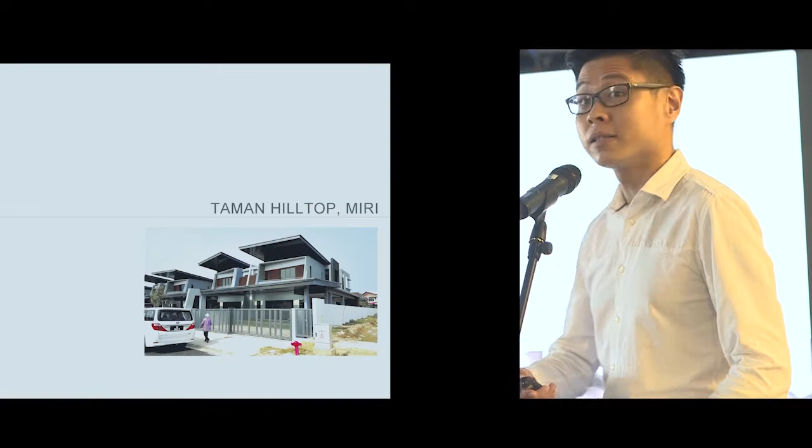So my first project is a small project in Miri. It's a semi-D project whereby the site is actually on the high ground nearby the airport.

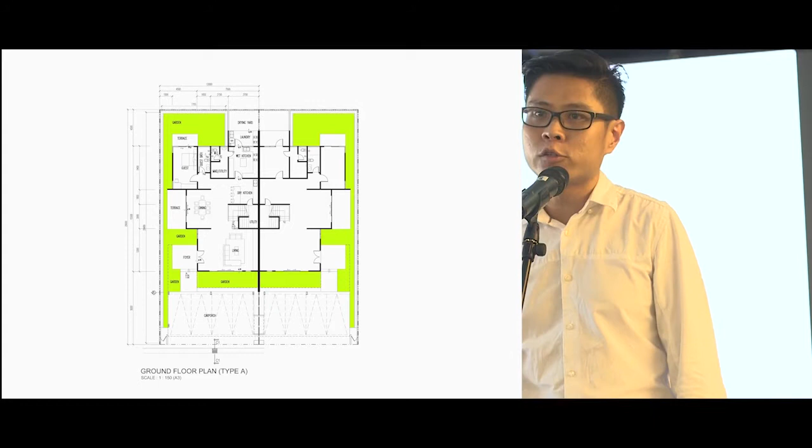So the client's requirement is simple: practical, market-friendly, do not break the bank.

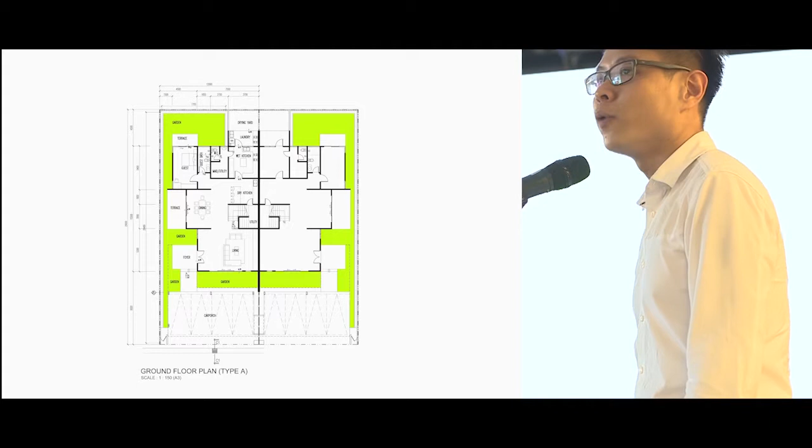So this is a floor plan that we came up with, something that's quite efficient and well accepted by the general market. So we were thinking, what can we do to insert some uniqueness into the project?

So we started with playing some Lego. That's my childhood pastime hobby. Now I'm doing it in SketchUp.

We did some form-giving exercise, adding up the roof. There are many versions that we did, so this is only one of them.

I thought the site is sitting right on top of the hill and you can actually see landings, the plane landing and all that. So maybe we could relate something to that.

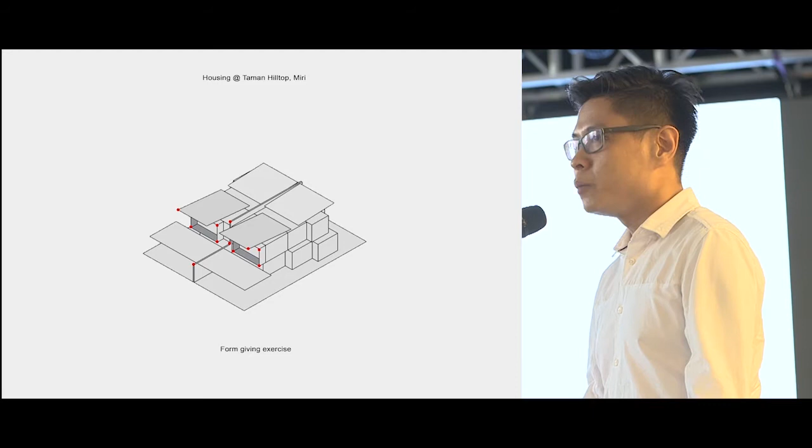Aerodynamism, adding some elements of high tech into it, and making it look a little bit like maybe a spaceship. So we start thinking of pulling in some points and trying to transform the shape into something less familiar.

It's an approach that I call the defamiliarization of standard form.

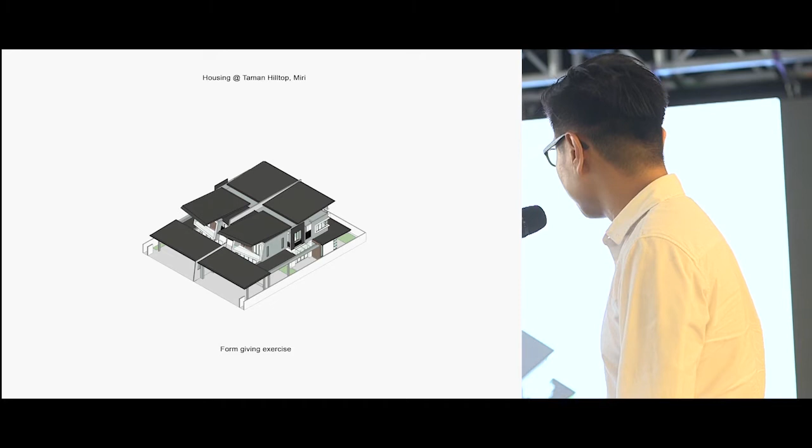The elements of a little bit of slanting lines are there. Most importantly, the client accepted it because it does not break the bank, and this is the final outcome. I'm reasonably happy with the result.

The second project I'm sharing will be Windsor Estate. For those who are in Kuching, you will be quite familiar with this project, where every time you drive from Boulevard to the airport, you will see this group of detached houses towards the end of the junction.

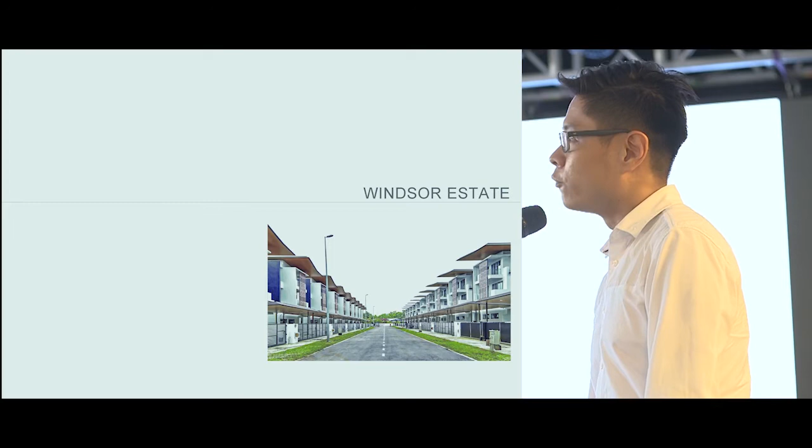So this is the location of the site, and there are about 51 units of them, all identical detached houses.

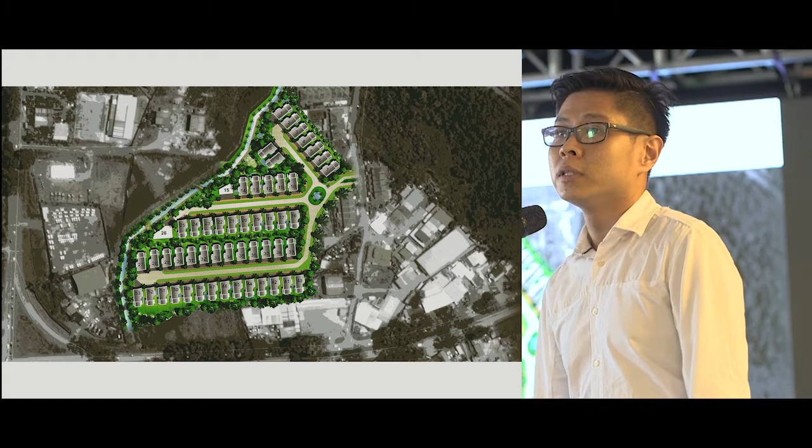In this project, we actually challenged the conventions or standard practice of housing typology. So it is a modification from semi-detached house typology.

This is actually a brainchild of my director, Dr. Sri John Lau. So I'm here just to convey how we developed the idea from a semi-D into a zero-boundary detached house.

But the underlying problem of this is when you need to paint your own house, you need to get consent from your neighbor. So we set back a little bit, 1 meter from the boundary.

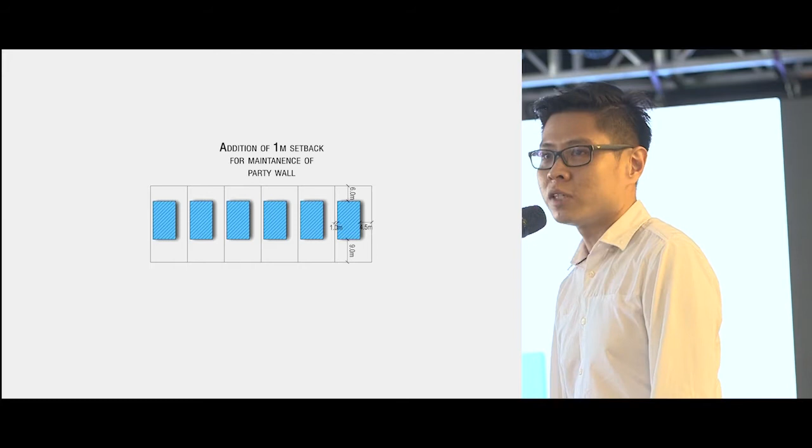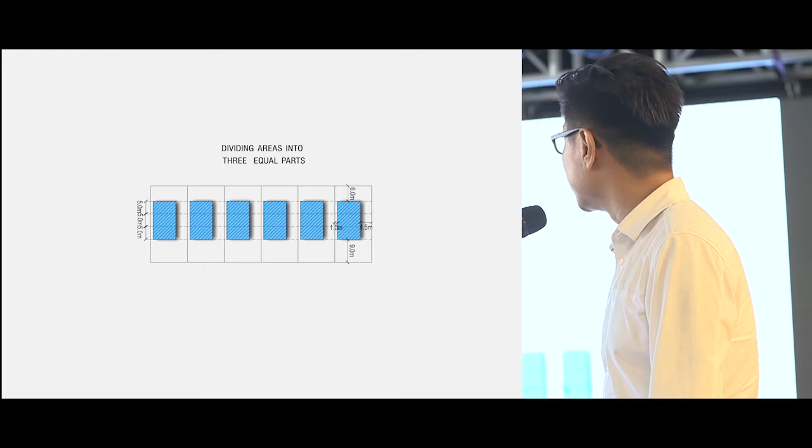So we tried another way. We divided the area into 3 equal parts, whereby we sacrifice a little bit of footprint and shift it, so it becomes like a zigzag kind of shape.

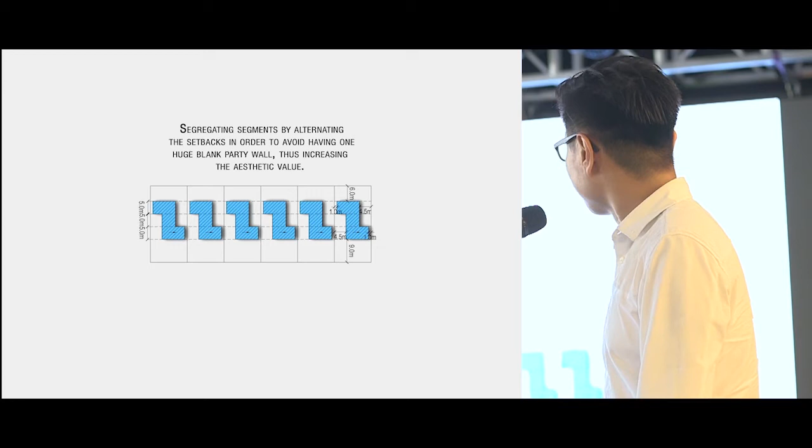This is a section over the house. We can see clearly that the split levels actually minimize the corridor space, and at the same time it also gives a much higher living room, much higher headroom for living room. We can achieve up to 4 meters at ceiling.

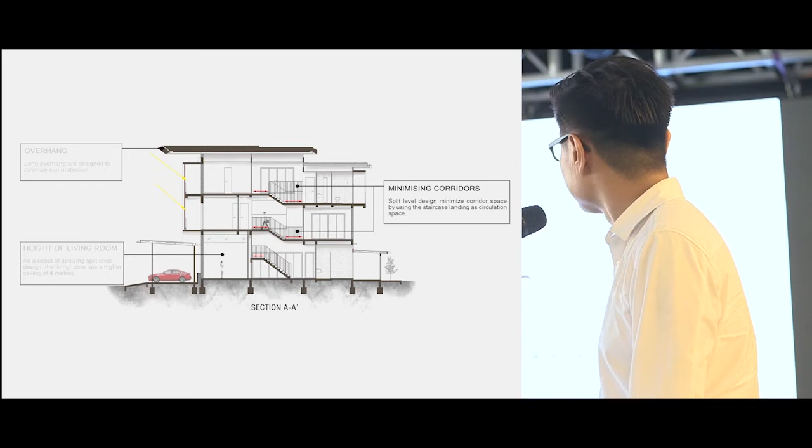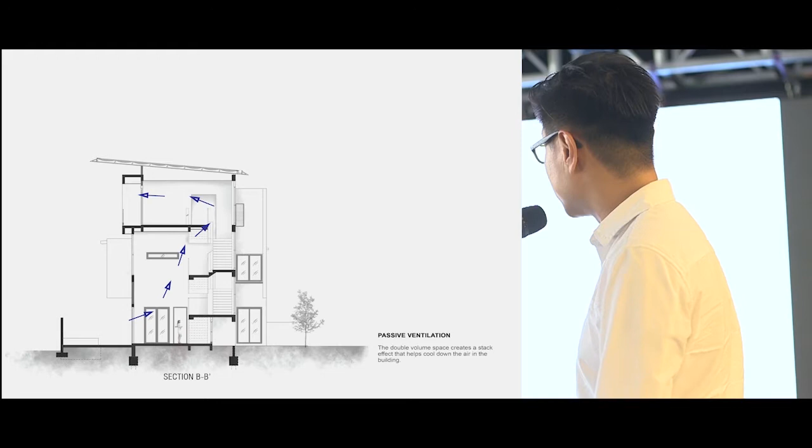Minimizing corridors again, and in the section through the central part of the house, we have a double volume dining room. Right next to it is a staircase, which acts as an air well. Hot air can come in from the sliding doors at the dining area and go up and exit through the family room up there, through the staircase as an air well.

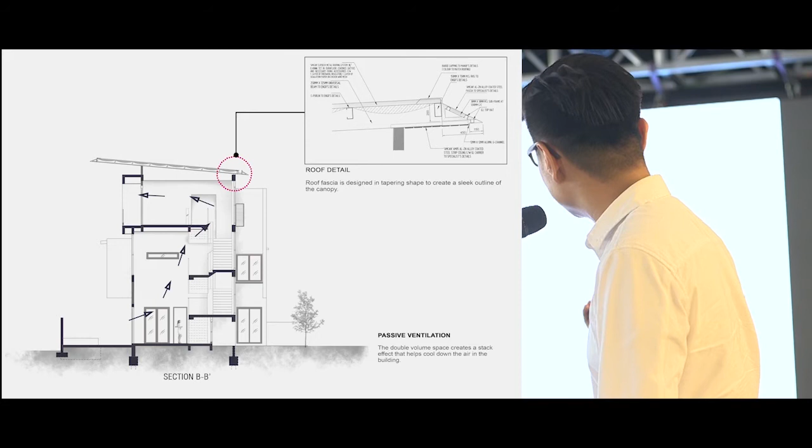Some details that we introduce are the sharp details, the fascia details, in order to make the roof look a little bit more sleek from the elevation. So this is the house.

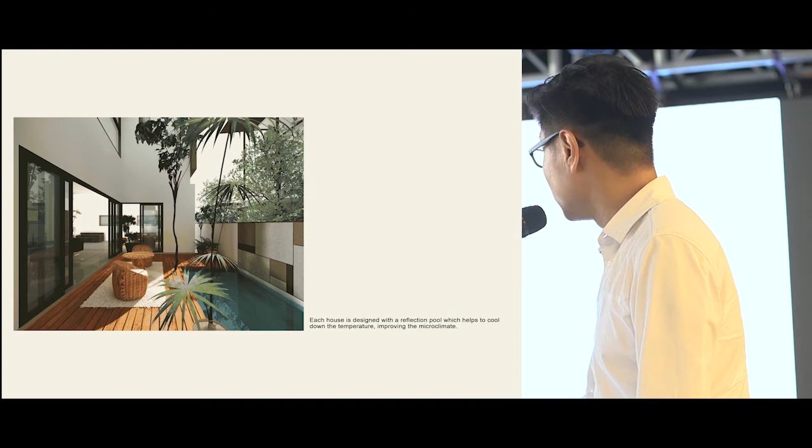So every house is equipped with a reflective pond, which can act as a cooling agent to the house. So this is a living room with high ceiling, and this double volume dining room.

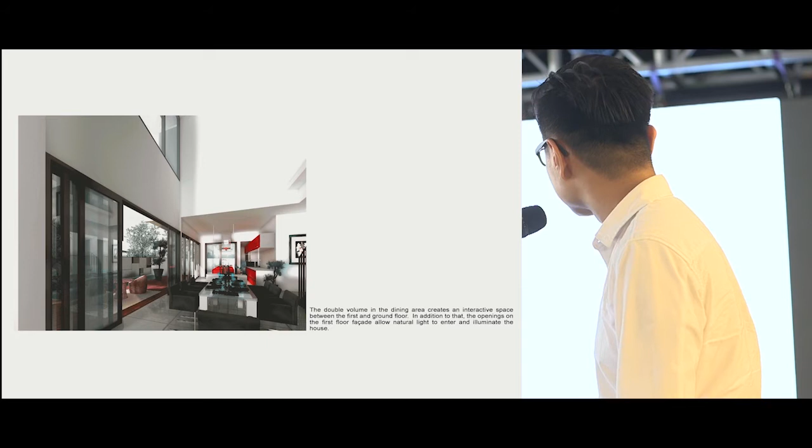So this was the rendering that we did for the marketing brochure. And I'm quite glad that it turned out the same, so we did not lie in our brochure.

So these are some other views.

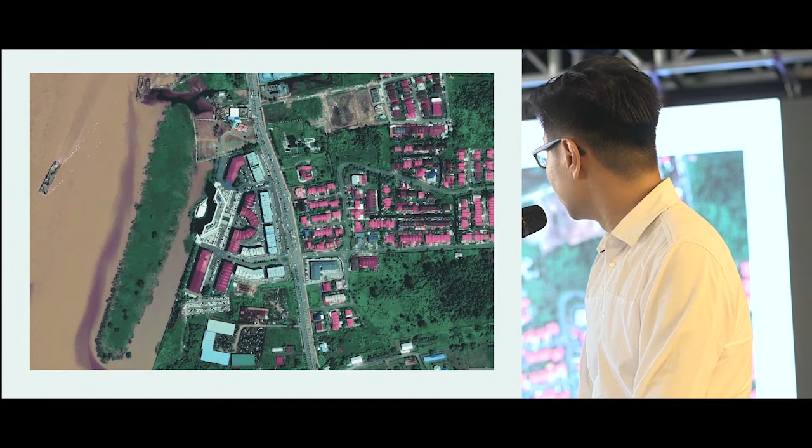So the next project I'm sharing is the first major project that I've handled as a project architect back in 2011. When I came into this project, it was already designed by a colleague. The site is next to Rajang River.

And this is the overall plan. This was the original design when I took over the project, designed by a former colleague. The concept is having a soaring, spreading wings on the top.

So the roof, what do you call that, the roof actually looks a bit like a soaring wing. And the archway in between actually signifies a gateway to Sibu. Also, as a corporate image for Rimbunan Hijau, which is a highly successful corporation originated from Sibu.

So this is a refinement that I did. I have a habit of doing models exactly as per tender drawings, so this was done exactly as per tender drawings. But towards the later stage of the project, the client decided to take out all the fins. It's a bit of a pity, but it's probably inevitable due to cost saving. So this was the final design of it.

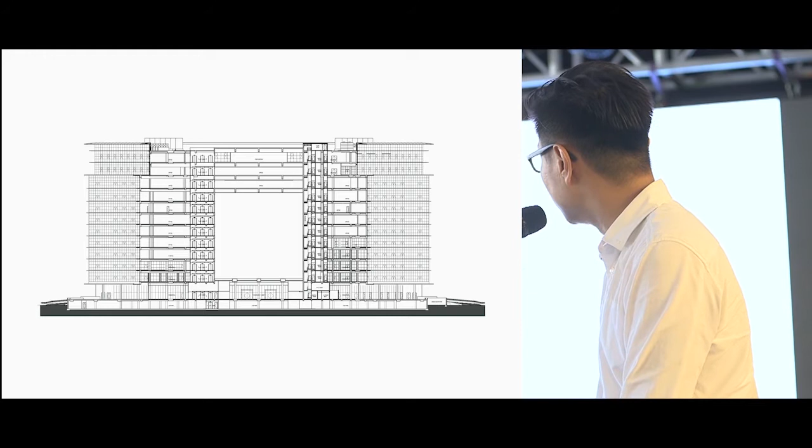So we have quite a long span in the middle, a 30-meter long span, and the engineers actually designed a series of box beams to support the bridge and form the gateway.

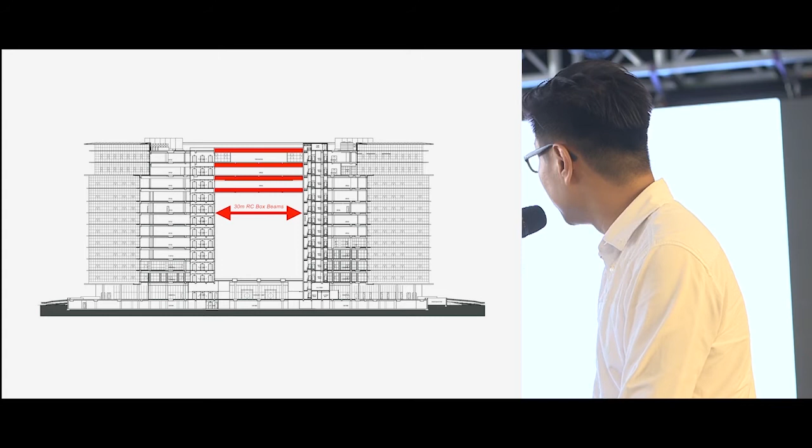In terms of the facade design, this was the working drawing that was handed over to me. So I thought, now that we can't do the fin, what can we do? One thing that we inserted into the facade is we vary the shades of the facade, whereby we introduce two shades of tint.

Another view from as you approach the building. This is the entrance view towards the archway, and another view from the other side.

There are some sharp corners that I thought were quite nice, but apparently some people do not like it because it's a bit too sharp and not good as feng shui, according to some.

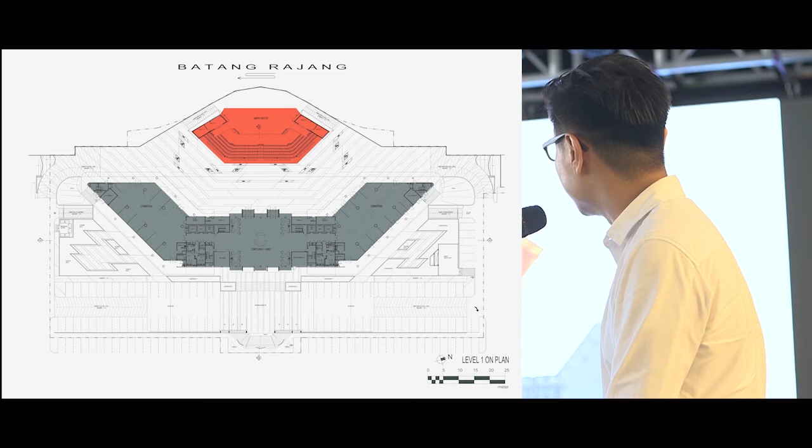We did some form study over the shaded area. So this is the study. We segmented them into a series of lines, and then we pulled up the lines to see what shapes we got.

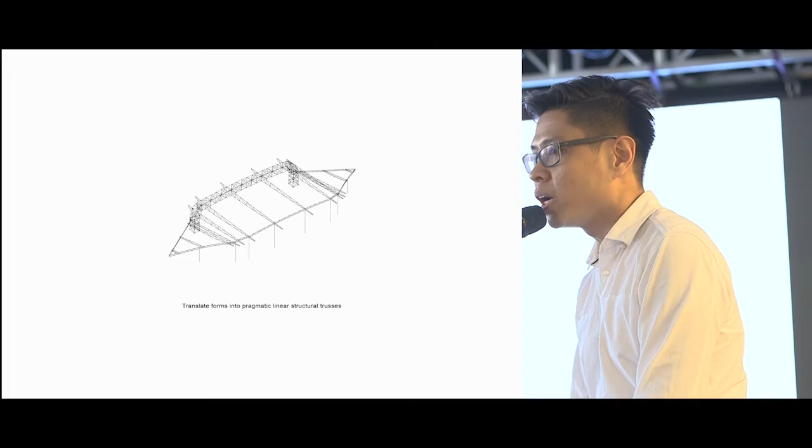This is the final shape that we've chosen. There are many shapes we've thrown away. We worked with the engineers to get a pragmatic, buildable structure using steel trusses, covered with standing seam roofing, to achieve the aerodynamic kind of shapes.

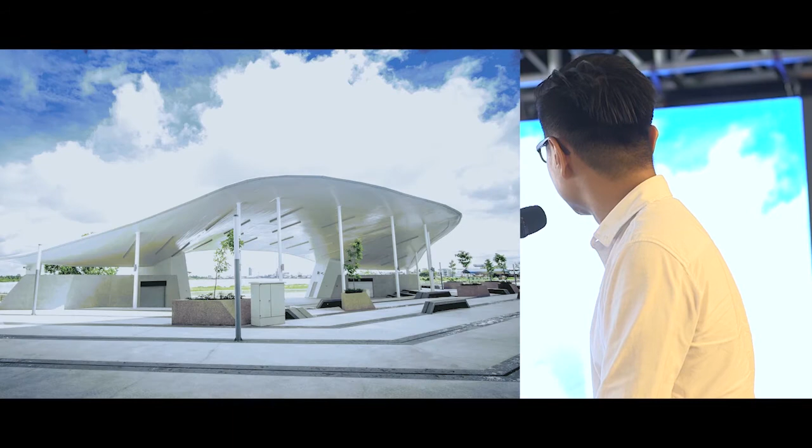This is the final result. This is a view from the low level, and another view. Unfortunately the workmanship is a little bit below my expectation, but the overall form is still there.

The next project I'm sharing is the New Sarawak Museum. Some of you may wonder how come the perspective looks different here. This is actually our winning competition scheme that landed us the job.

But it wasn't as what we have now. This is the competition scheme. It started with a tremendous study on the site.

This was the original Dewan Tun Abdul Razak, if some of you are familiar with it. It's an old building, so the site actually had an unfriendly access.

You need to enter from Jalan P. Ramlee, which is perceived as the back door or the back side of the street.

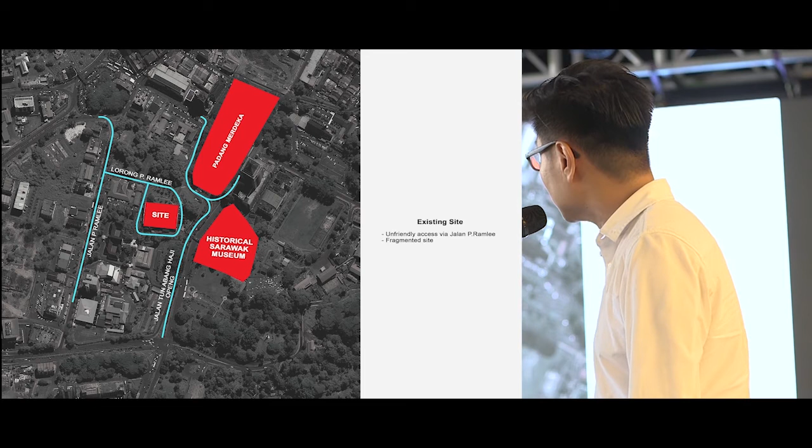Another issue we saw is that the site is very beautiful with greens, a bit of a hilly kind of space, but then they are all fragmented in a way. The Padang, the Historical Sarawak Museum, and the new museum site are all fragmented into three very strong, solid, independent blocks.

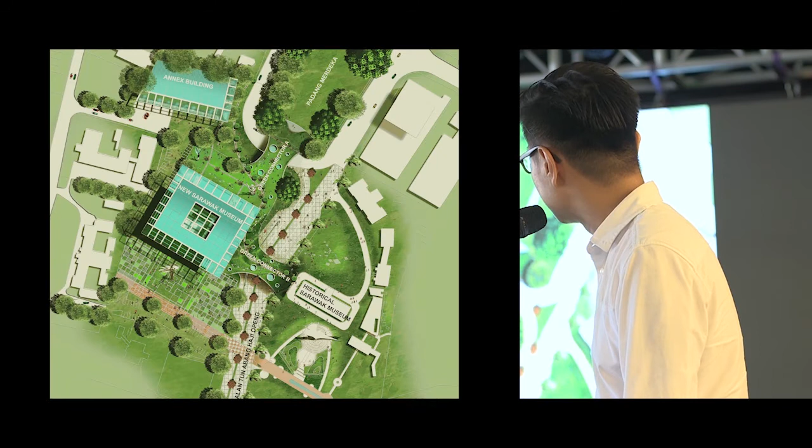There are two of them. This site plan shows one - you can see there is a green connector A connecting to Padang Merdeka, and the other one connecting to the Historical Sarawak Museum, with the new Sarawak Museum sitting in between the two.

In a way, it actually weaves the urban fabric together into one. In terms of the form-giving exercise for the new Sarawak Museum in our old scheme, we looked into two different approaches of creating a museum architecture.

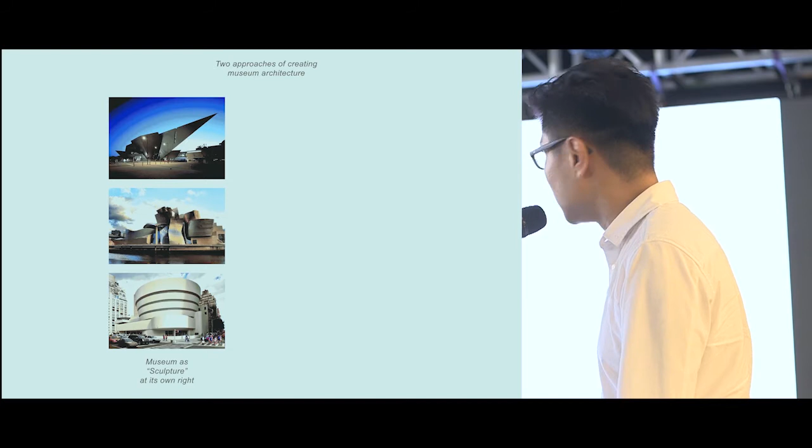One is that we can design a museum as a sculpture, in its own right - just like this Denver Art Museum, Guggenheim Museum that all architects are familiar with. Or we can go for the totally opposite approach of museum as a functional space to showcase the collections.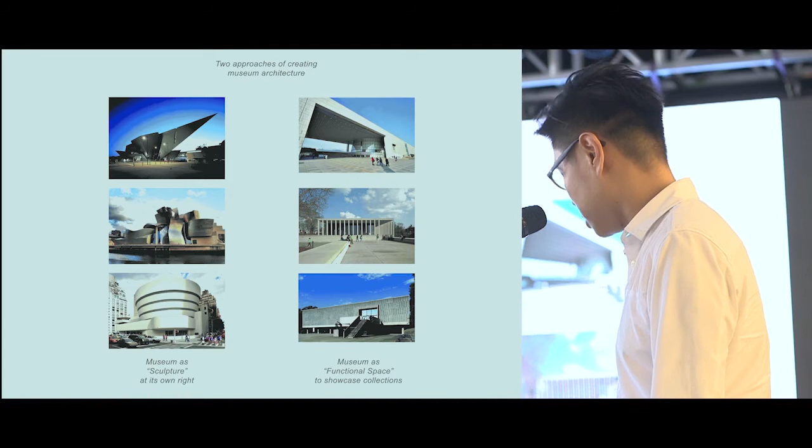What we found is that architects tend to love the method on the left, while museum practitioners love the right side. So a conscious decision among us was to go with the right side of it.

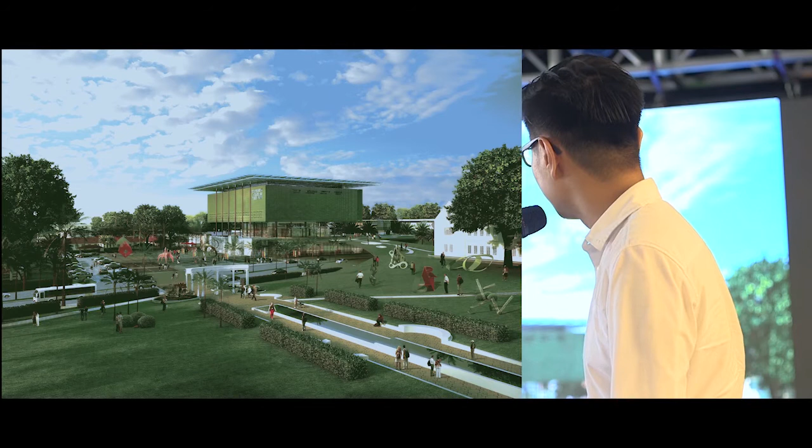This is a view from the Hero Memorial. You can see another green connector connecting to the Historical Old Museum.

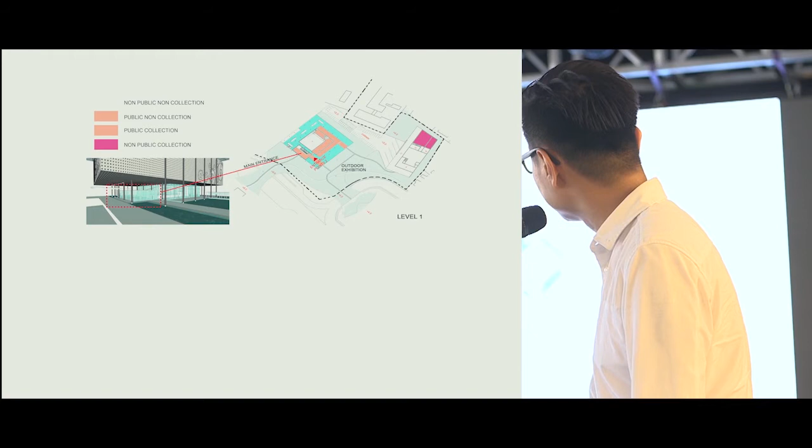So in terms of the internal planning, we studied a little bit on the visitor circulation. This is the floor plan diagram of level 1, which is actually at the top of the bridge. There is one entry point from the top of the bridge, and they enter from level 1.

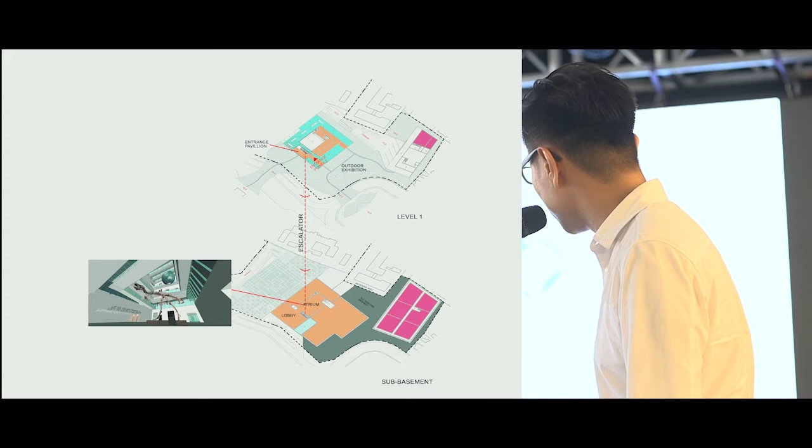The escalator will bring them down to a sub-basement, where the main lobby actually happens, with a central atrium next to the lobby. This small image indicates the lobby and the atrium. In order for visitors to visit the museum, they have to take a lift to the top floor at level 3, and visit the galleries from top down with winding ramps from the top. This is a concept inspired by the Guggenheim Museum.

So from level 3 to level 2, similarly from level 2 to level 1, and there's an exit point at level 1 to the outdoor exhibition, or they can also go further down back to the sub-basement.

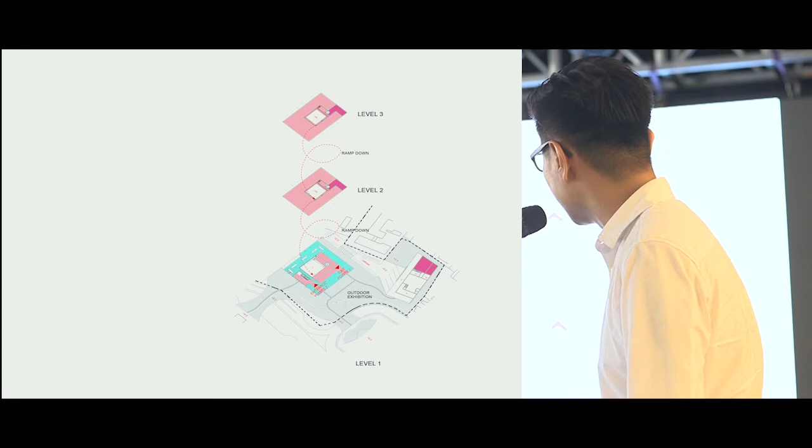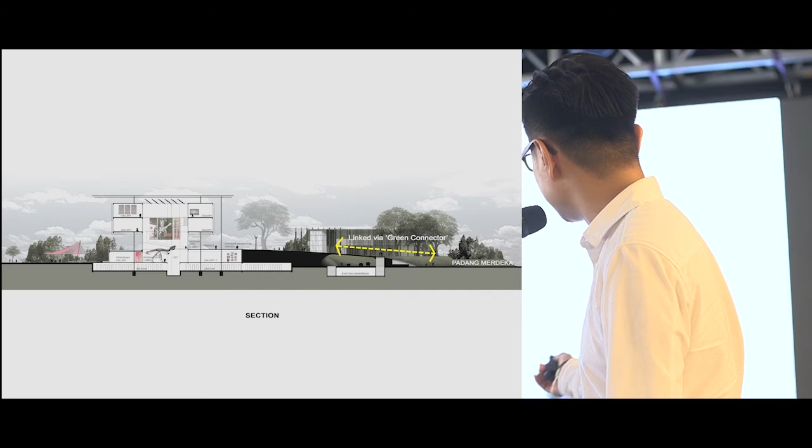This is a section through the building. You can see the link between Padang Merdeka and level 1 is seamlessly connected together.

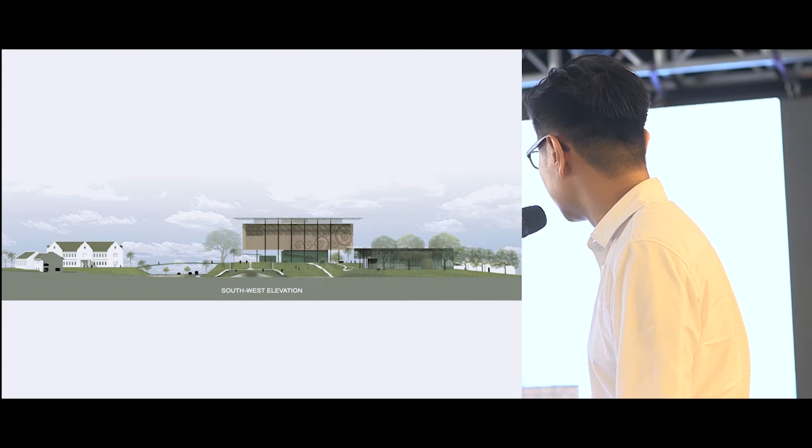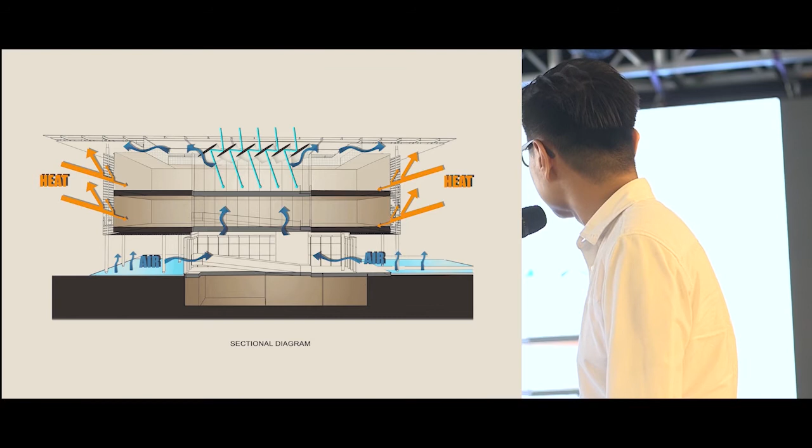And this is a night view.

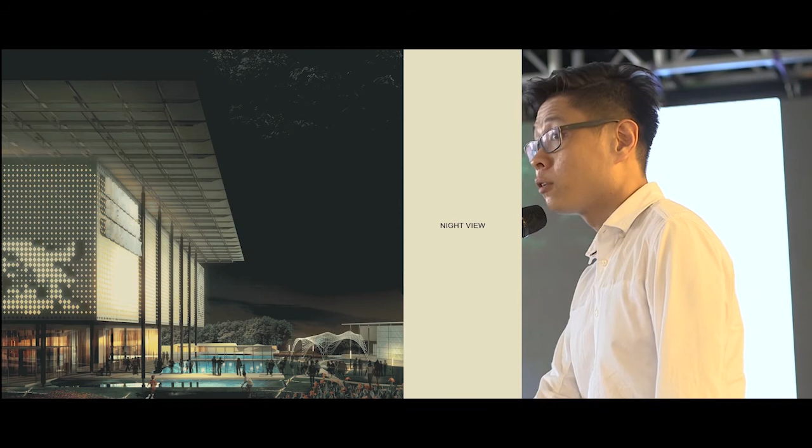So fast forward a year from us winning the competition, we got a call from the client saying that, okay, so...

This of course is the latest design of it, but a bit of history of why we did the design: the client actually requested us to have some correlation with the existing Dewan Undangan Negeri building, because the two buildings are actually located on the same axis, and from one building you can see the other clearly, so they preferred to have a similar language of architecture.

Of course, we also proposed quite a number of schemes, about 12 schemes. There's the one we originally submitted, and the one they selected, and in between there were many schemes located somewhere between the two, modern and the language that they wanted.

So they chose this scheme, which was originally prepared by our colleagues in Kumpulan Design Cebu.

You can see that some of the original concepts were retained, like the crane connector to the historical Sarawak Museum. However, the other side of it was eventually omitted due to cost constraints and also technical difficulties. But we retained the existing underpass anyway.

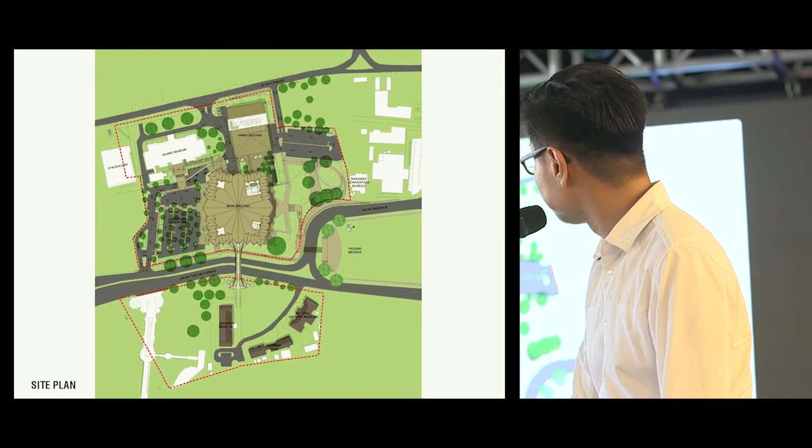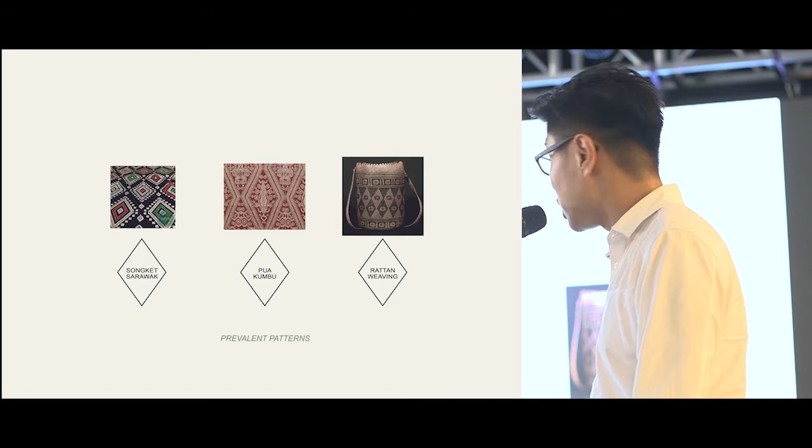This is the external wall cladding that you can see from the solid part of the main museum. The patterns are inspired by recurring patterns in our traditional crafts: Songket Sarawak, Pua Kumbu, and rattan weaving. They all have similar basic shapes, which is a diamond or rhombus shape. So we took those shapes and developed them into the facade.

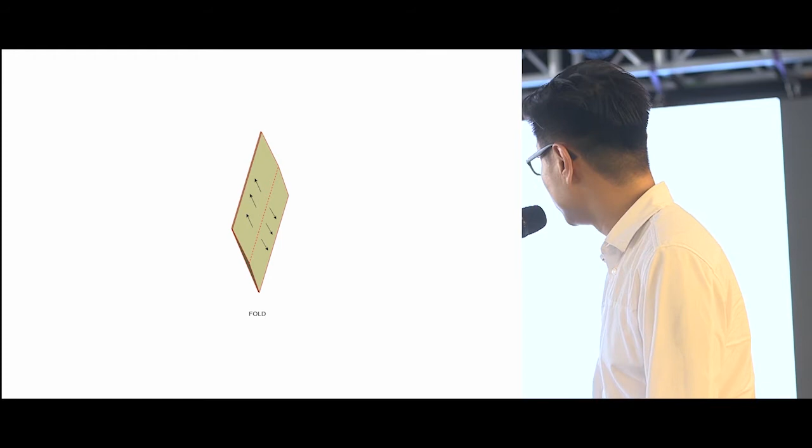These are basic shapes, so we fold them. First we fold it, then we add some lines, because when using composite panels there are some size limits we can go for. Thirdly, we add a slight color difference to get the effect of a triangulated 3D look, without doing too much folding, because that may be technically difficult to build. So we use color to achieve the effect instead.

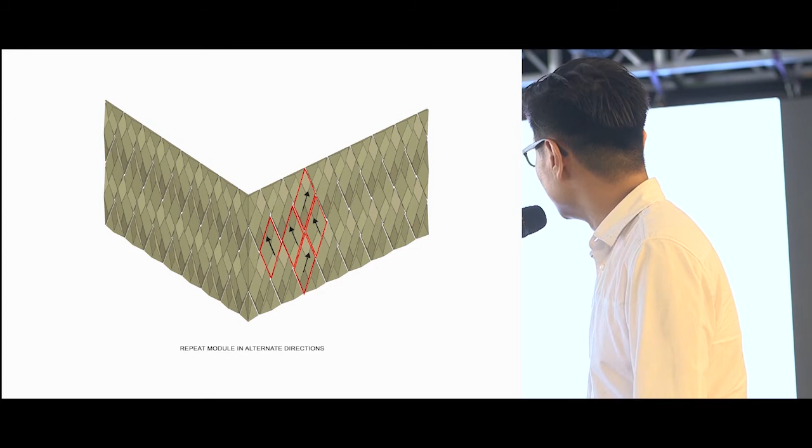So with this module, we repeated it throughout the facade, and this is the result that we get.

These photos were taken in one evening, and I was expecting the facade to have 4 different shades of colors. But that evening, I was pleasantly surprised that in certain sunlight, it actually gives us more than just 4 shades. You can see from the right hand side of the facade, where the sun shines onto it, there are multiple shades of colors.

This is a close-up view. Over here you can see there are two color differences, and at different angles, when sunlight is projected onto it, it produces different colors. So there are 4 color differences. These are views at night.

I'll also share a little bit on the museum's internal zoning, which some students here may be interested to know. In a typical museum, the zoning is divided into mainly 4: non-public non-collection, non-public collection, public non-collection, and public collection. It's a little complicated, but it mainly talks about 2 things: one is the visitor, and secondly is the collections.

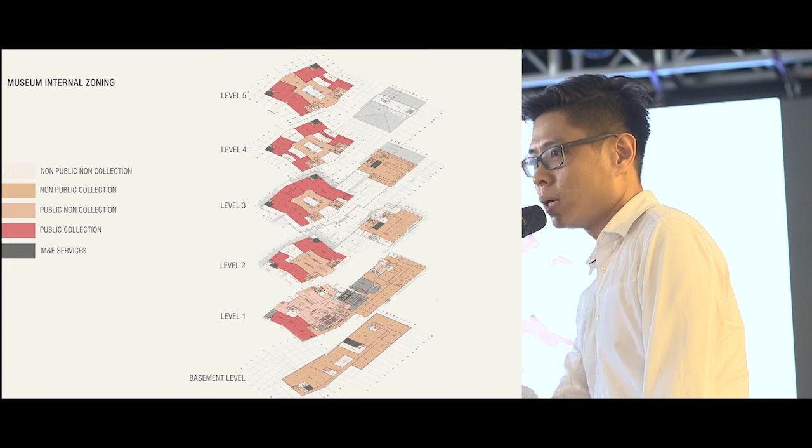First, I will go through a little bit about the visitor circulation throughout the museum. We have 2 entrances. One is from the basement level, which is a car park, and from there level 1 would be more like an event space.

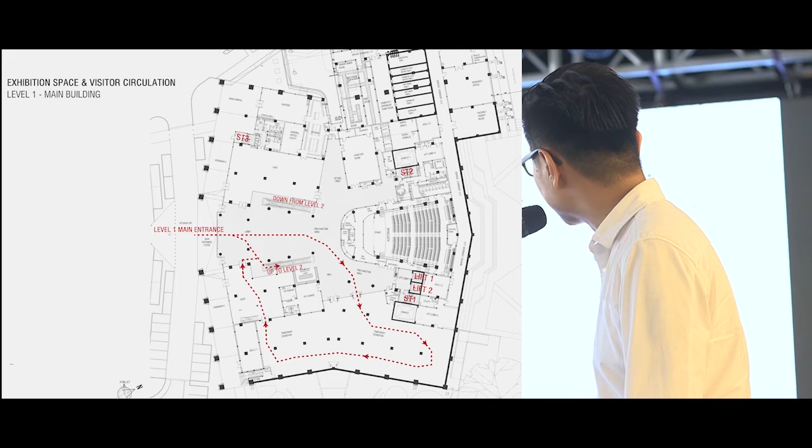We have a temporary gallery where visiting exhibitions will come, and they will change the exhibition every now and then, every few months. We also have an auditorium, function room, and some supporting services. This level is intended to be more active in a way, and it can be a bit noisier than the rest of the museum.

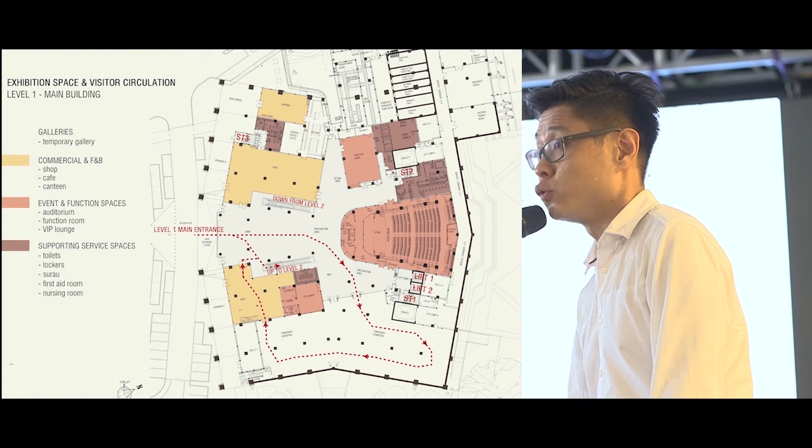At level 2, this is the main level of the atrium, so there are galleries on both sides, and some commercial spaces. The circulation basically repeats throughout the museum at every floor with a similar configuration. The only difference is some galleries are a lot bigger and some are a lot smaller.

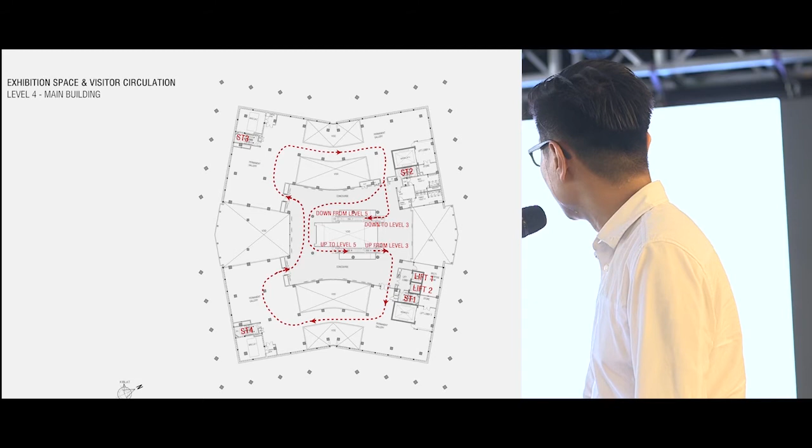Like on this floor, the galleries are smaller, and we crafted a number of voids looking towards the gallery below. This also gives a bit of flexibility to the museum so they can actually place bigger objects in the voids.

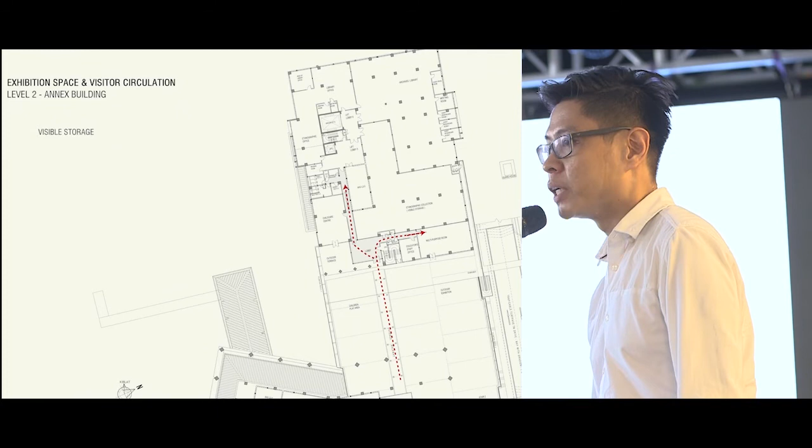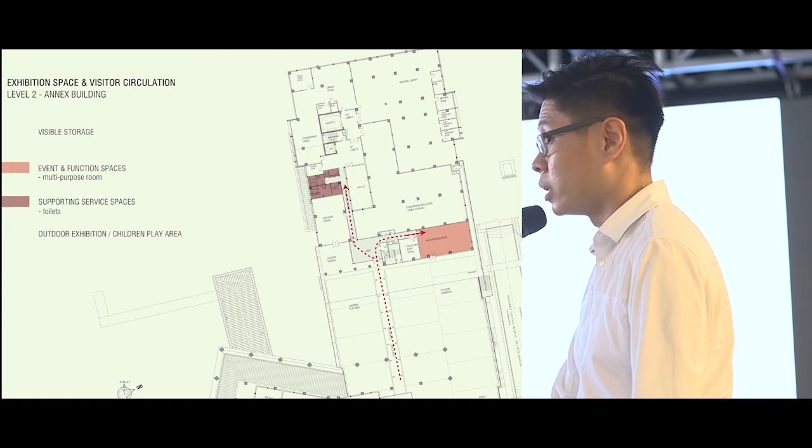So these are all the repetitions. We also have a bit of visible storage at the annex building. And this is the section through the atrium.

One can arrive at the level 1 entrance void, and the event space all happens at level 1. The main atrium void is at level 2. There's another entrance at level 2, whereby you can go through the underpass and reach level 2 of the museum.

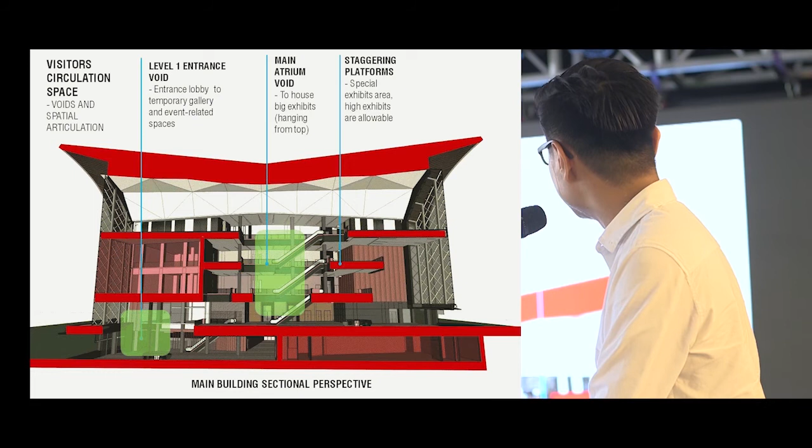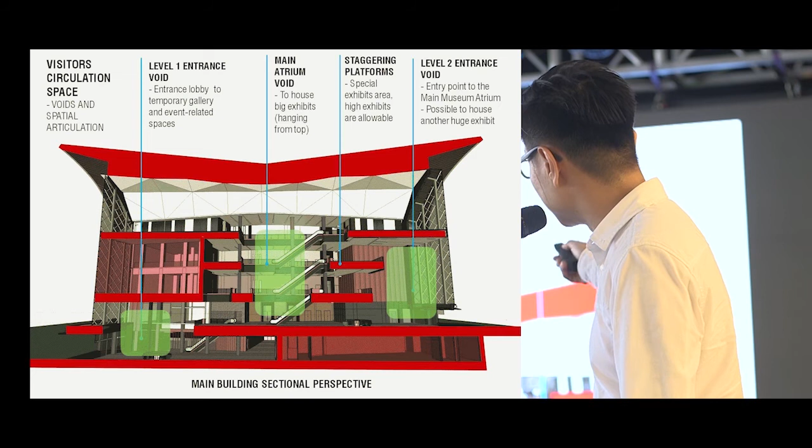We also introduced a staggering platform for special exhibit areas. Actually, it's meant for the museum to put large objects onto the platforms. Because of the volumetric design of the atrium, the museum can move multiple big objects onto the platforms.

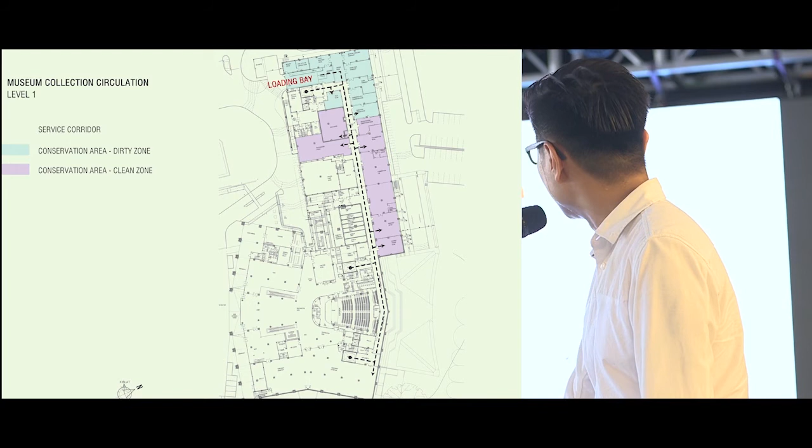Another aspect of the circulation is from the point of view of a collection. So if, let's say, the Mona Lisa decided to come to the museum, it would go through this path. They load them at the loading bay, first go through the dirty zone to unpack the exhibit, and then go through the clean zone, where they fumigate the objects and go through the conservation lab and all that.

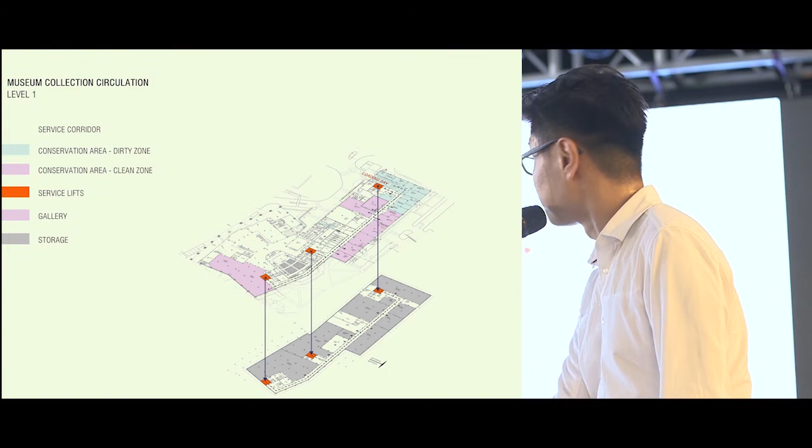They can either go through the service lift to other floors, or go straight to the temporary gallery. The service lift brings the objects either down to storage or up to the galleries. There are strictly no crisscrossing between visitor circulation and collection circulation. This circulation at the bottom leads to the storage area.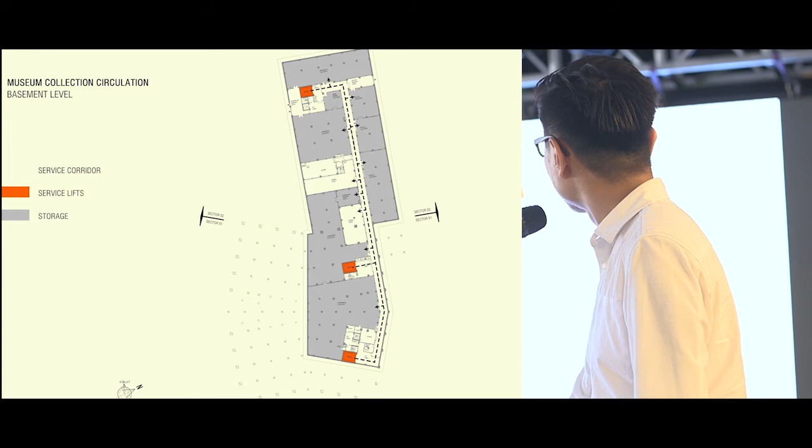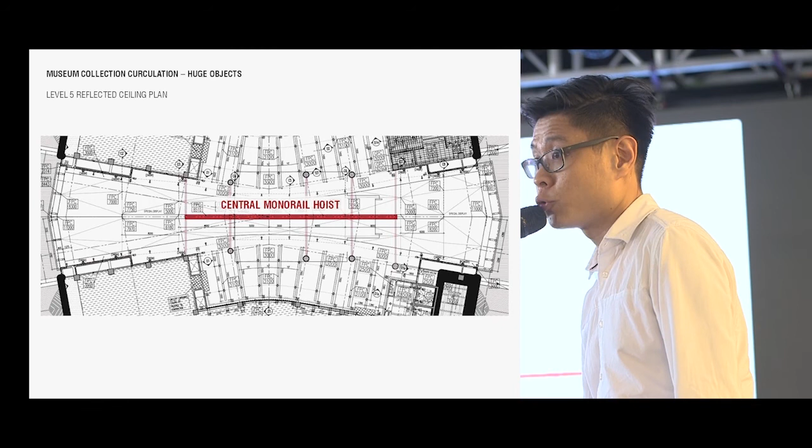We also introduced a central monorail hoist at the middle of the atrium. This is the reflected ceiling plan of level 5, where there's a hoist hidden inside the ceiling. The function of the hoist is that when the museum has, say, 10-meter long objects that cannot go through the service lift, this is where they can transport the objects.

The staggering platform that we designed originally incidentally served this purpose. It wasn't designed originally for the hoist idea, but somehow it served the purpose of giving an option for the museum to land big objects at every level, which is something that probably not many museums are able to provide.

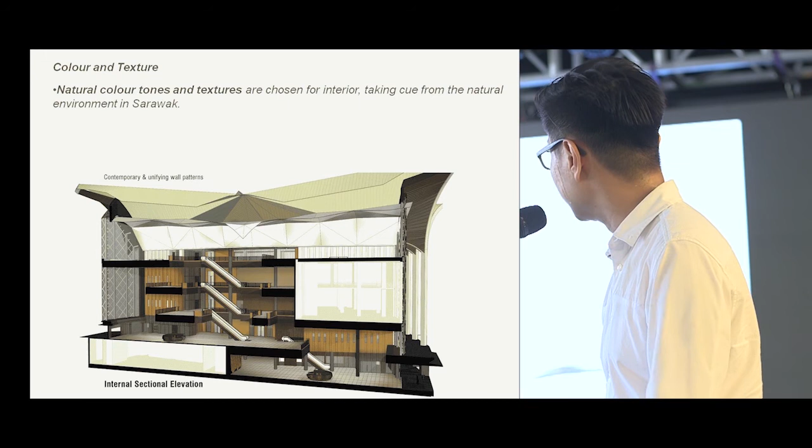In terms of color and texture for the interior design, done by my colleague Sharon who is here with us, we deliberately chose natural color tones and textures that are darker for the lower floors and lighter at the upper floors, signifying a transition from earth to sky, resembling a variety of Sarawakian landscape from a riverbank to a mountain.

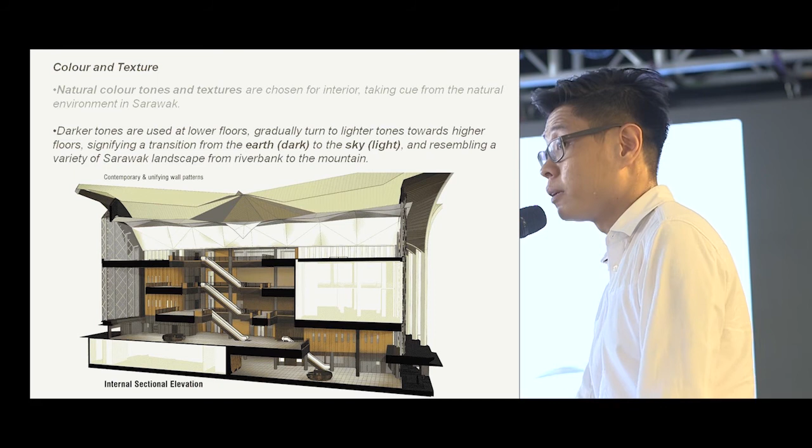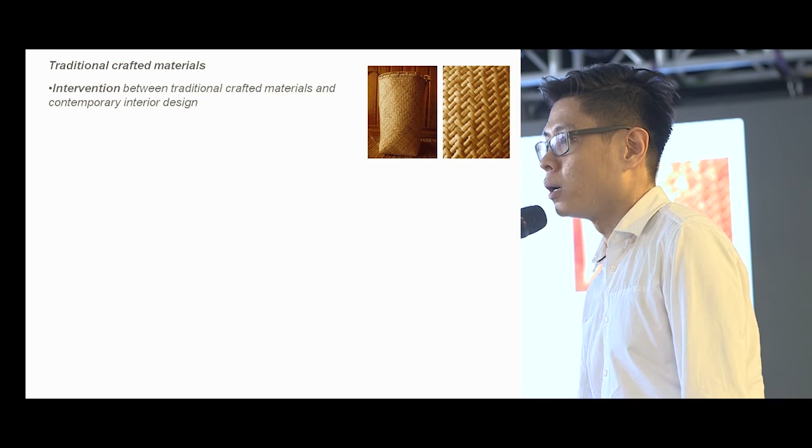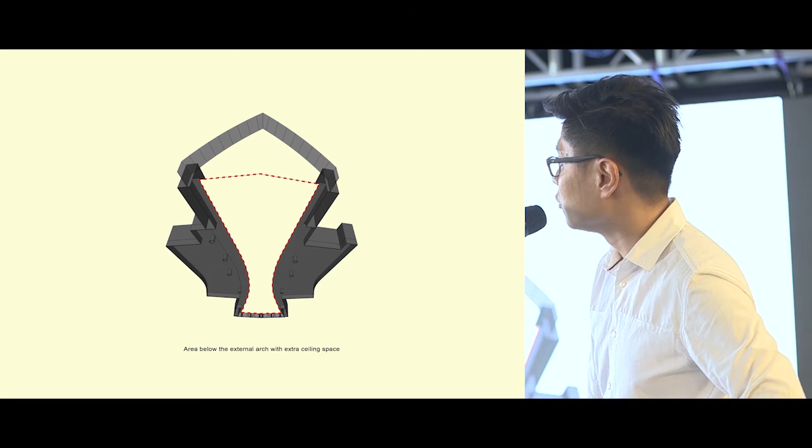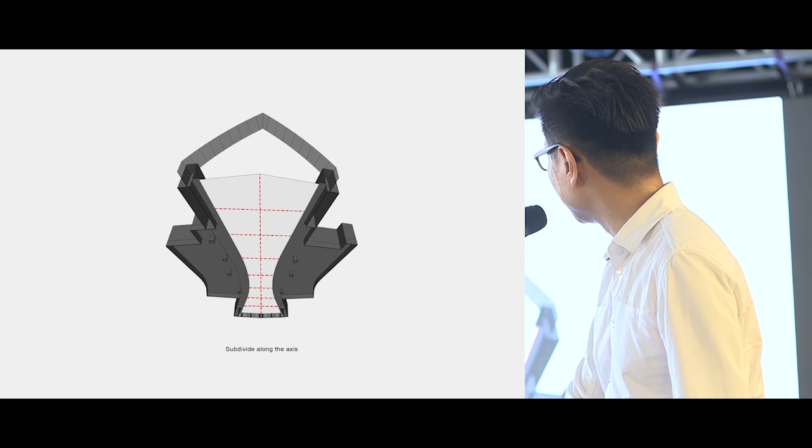Another part of the atrium design is at the top, the ceiling, where below the arches we have a huge ceiling space that we could explore for some special design. The red part signifies where the area is, and again we did some study for the form, subdividing segments along the axis, in harmony with the facade design from the exterior.

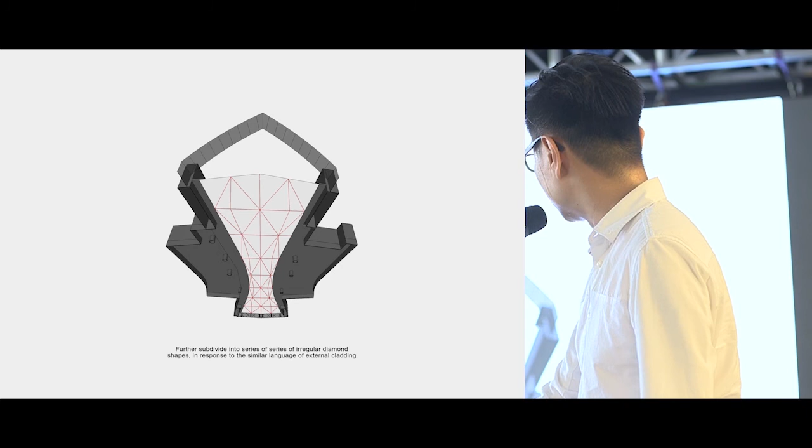We carried this to the internal design, drawing some lines and pulling the lines upwards. This was a long process - we did many versions before arriving at this final form. We incorporated the M&E and smoke spill systems into the middle parts, and this is the final result.

This is another view with the lighting on. It's located at the top floor, consistent with the idea of having a lighter tone at the top, signifying the transition from lower levels to the top - more like the sky at the top, and the lower parts more like earth.

We managed to keep one green connector being built. It was quite a long process working with the structural engineers. We had a number of good fights, although surprisingly both of us are quite happy with the result, even though we hardly agreed on anything throughout the design development process. We remain friends though.

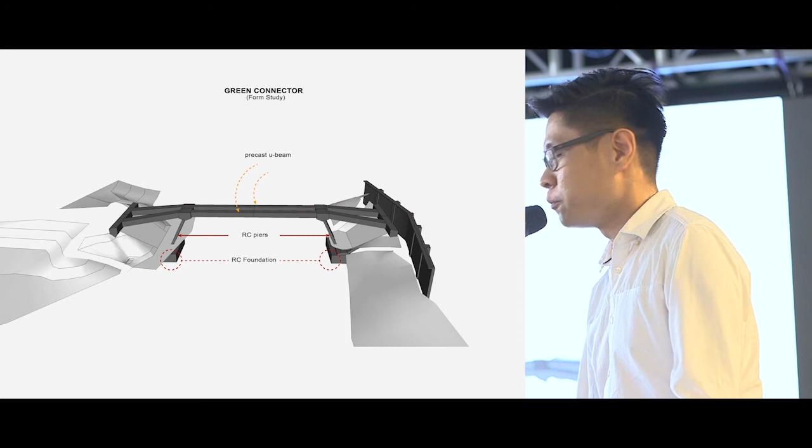The structural design is done with a precast U-beam with two RC piers, something we had a lengthy debate on regarding the approach, but we settled on this. The engineer gave us this shape and said this is all you can do, don't change it. We said no - we segregated the RC fascia at the edges and turned it into a smooth form. The contractor said it was very much buildable.

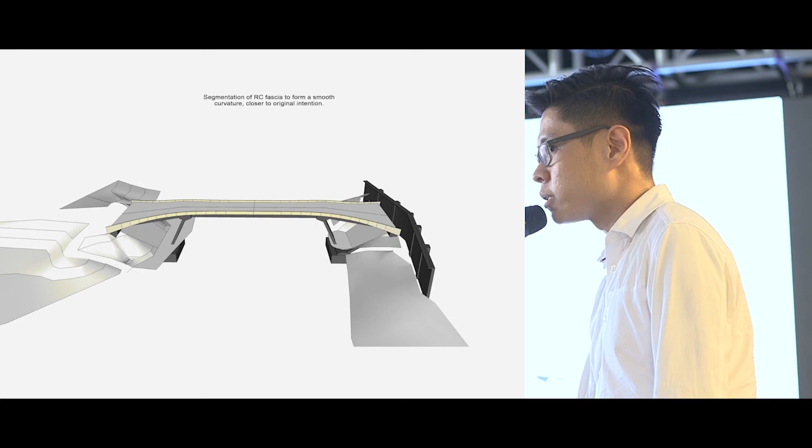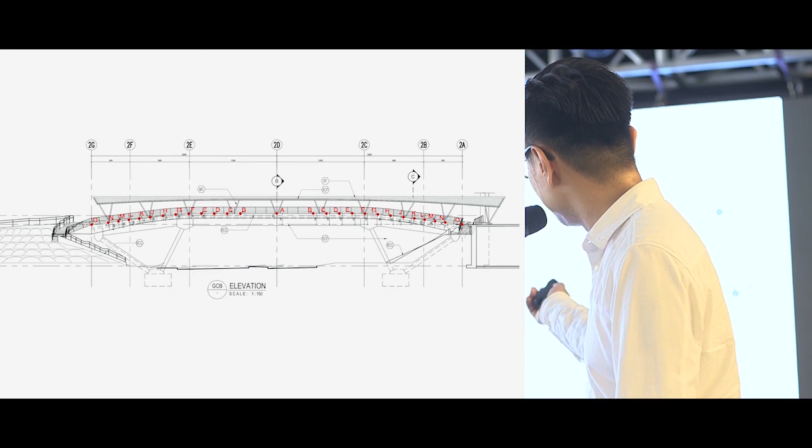We set coordinates for the contractors from the elevation and from the plan. There are many points from A to P - basically a series of linear lines joined together with vertical and horizontal coordinates. The contractor managed to execute it pretty well.

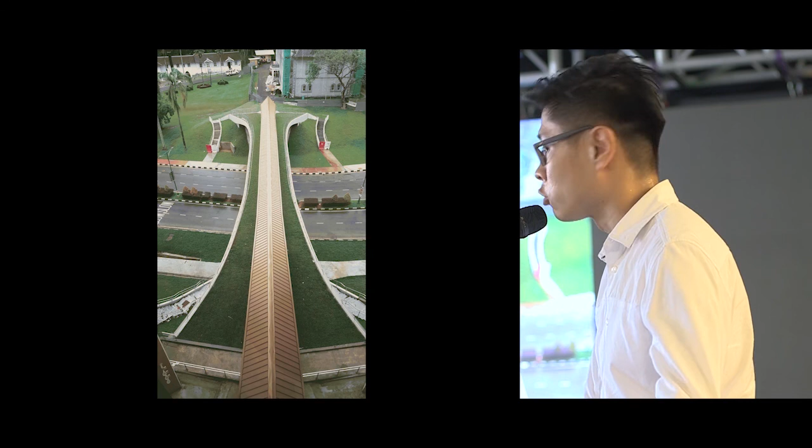This is the view under construction, and when it's completed, it's just around the corner. I don't have many good photos of it, but if you drive by you should be able to see the bridge already - this is another photo of it.